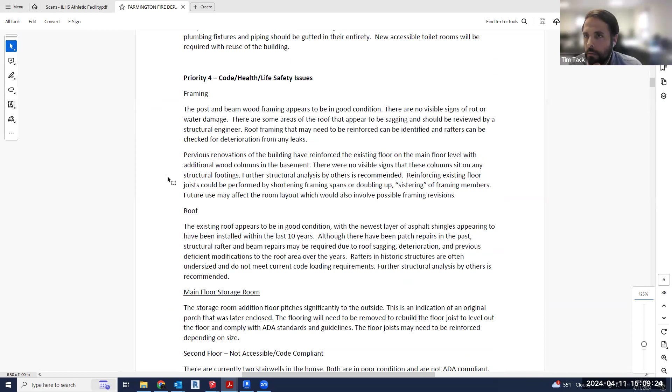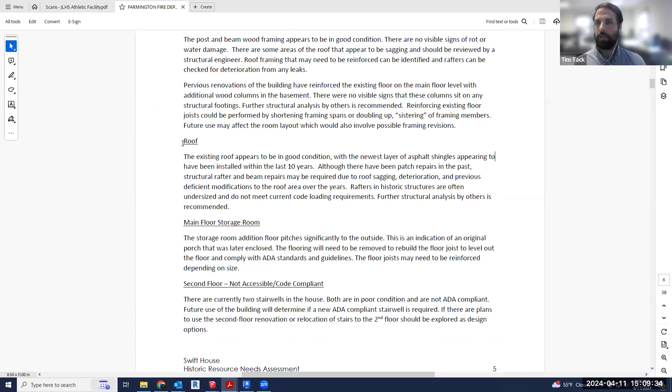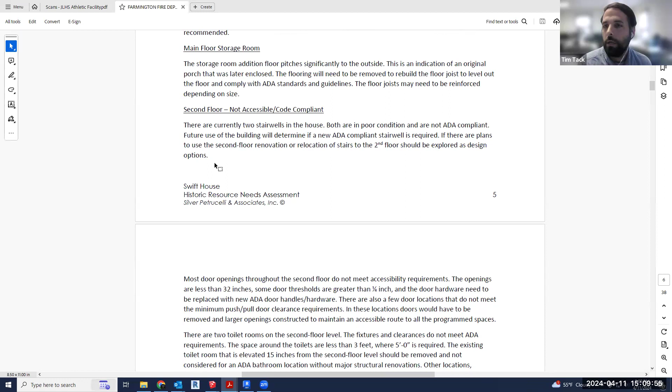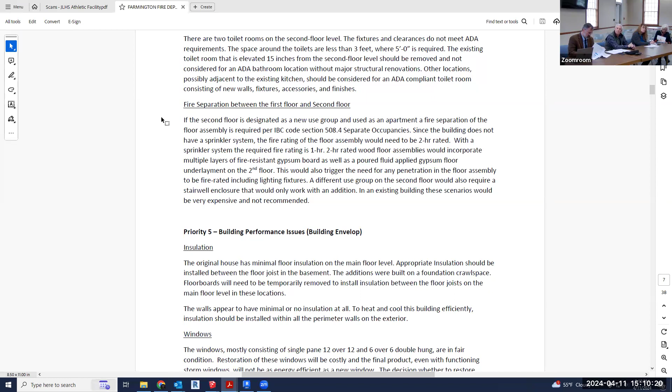So yep, priority 4. So it's the framing issues, the roof. It talks about the main floor storage room, the pitch of the floor and how it needs to be restructured and flattened out. And then I also have the issues leading up to the second floor. It discusses restructuring the stairs. It also has a segment in it about changing the use to an apartment and what that entails, as far as creating a fire separation between the first floor and second floor. This kind of direction would also lead to the need for an enclosed stairwell, which I included as an alternate on the drawings.

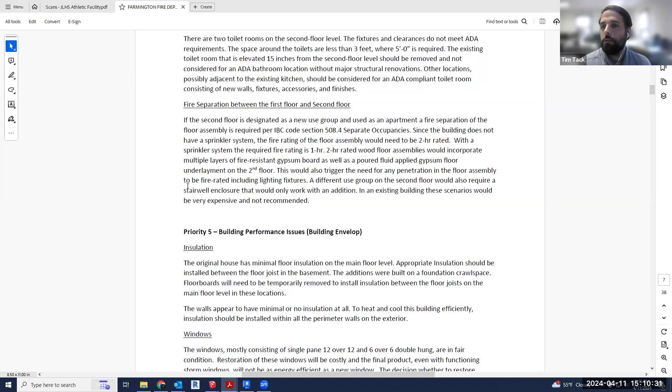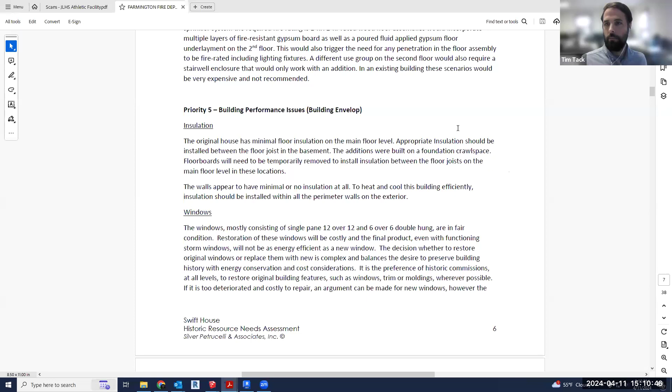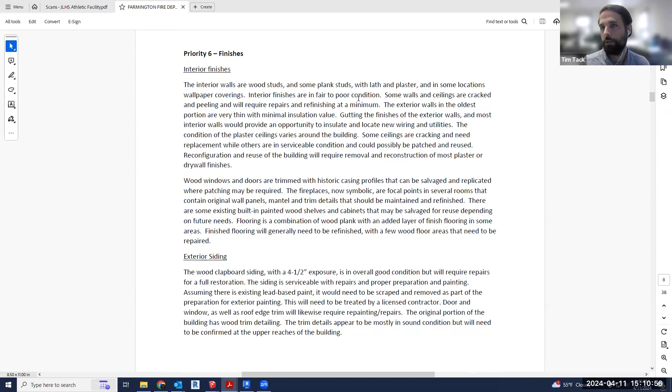Moving on to priority 5, building performance issues or building envelope. This really relates to the enclosure of the building, with the windows and the insulation. And priority 6 is finishes. So it would be interior walls, ceilings, floors, and exterior siding.

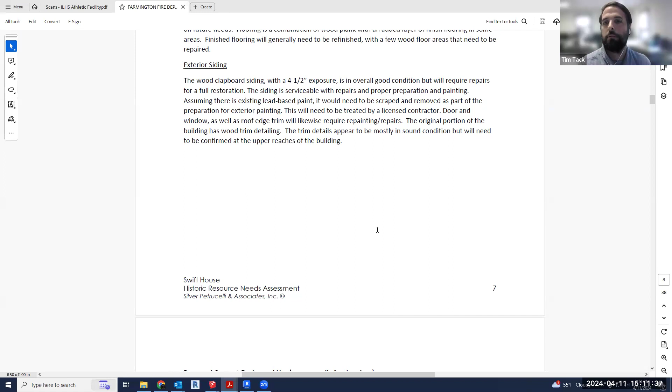And I also wanted to say that the priorities 1, 2, and 3, updating those ADA requirements, also is triggering the need to update your heating, your cooling, and electrical. Not on a full capacity, but if you look at the outline, you'll see the effect it has and the cost related to it. Where did that come in priorities? Tim, can you explain that? Because I'm mystified by that. How is the HVAC system tied to the ADA? Right.

Well, changing out or redoing a bathroom is definitely gonna need you to do new plumbing there, new electrical. The heating and cooling, that's not necessarily a requirement, but based on the conversation we had last time, we talked about the idea of the space being heated and cooled. I know someone mentioned in the summertime the need for cooling the space for the people that are gonna use it. It's not really like a code requirement, right? No. Okay, all right.

Well, if we're making modifications and we're doing a renovation and adding a bathroom, whatever systems are adjusted by that one space, we need to bring those systems up to code. So the reason why HVAC is referenced for a bathroom, for example, is exhaust, right? You need exhaust. And that's a fairly simple system in terms of exhaust fan in a bathroom and so forth. But in terms of heating, if we're connecting to the existing system, how are we connecting that to make that work? Are we adding other ventilation into that space? So it's related, it's a byproduct of the extent of the renovation. And I think that's what we were trying to make sure we don't lose sight of when we're doing these ADA improvements and we're moving walls and we're putting in new systems. There's ancillary items that tie into that level of renovation and alteration.

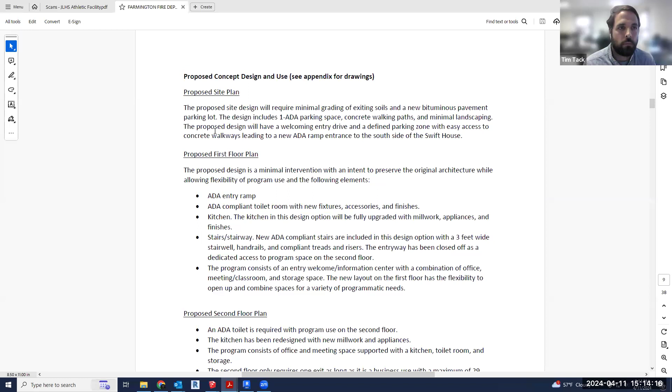The building code has different levels of alteration. A level 1 alteration is, think of it as just you're changing carpet and paint. You don't need a building permit. You can do that on your own, your house or in a residential building. Once you start moving walls and doors, you enter into a level 2 alteration, and that begins to trigger other code requirements that go along with it. So there's a bit of a path that you take through depending on the extent of the work. So that's sort of the context that we're trying to explain within the report. Okay, thank you. You're welcome.

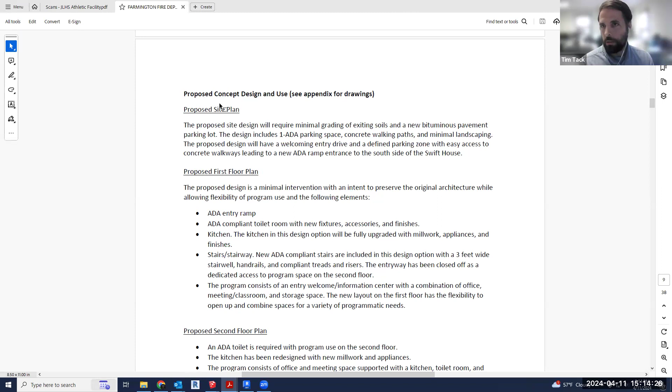So, the second part of the report talks about the proposed site plan, first floor plan and second floor plan. And I made modifications to the site plan just to include one ADA parking spot and then a path that leads to an ADA entrance from a ramp on the back, on the south side of the original building.

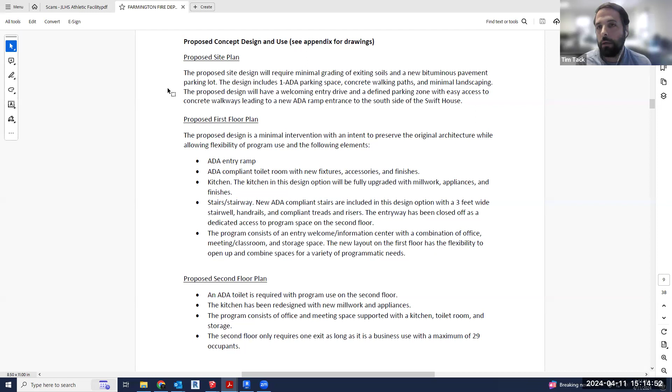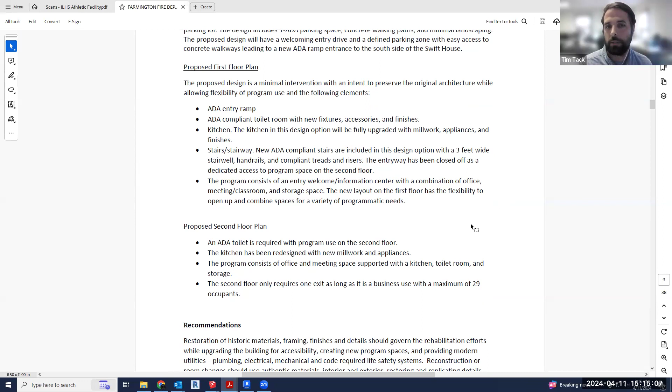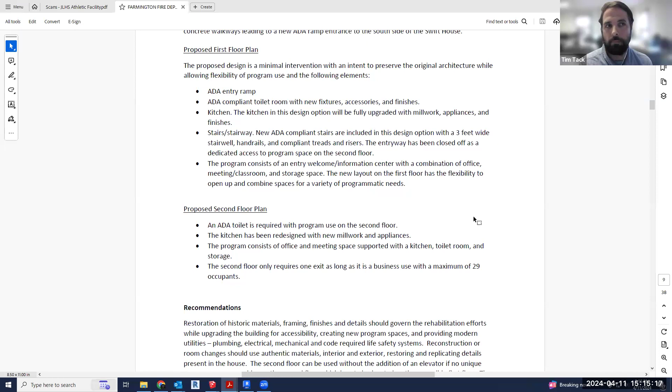And the proposed second floor is basically the same as was proposed last time. The only thing I added was an alternate for an enclosed stairwell on the exterior, if you decide to go the route of changing the use and making it an apartment. It has to be on the exterior, did you say? It has to be enclosed, like a fire rated enclosed stairwell.

There really isn't a lot of space to create an enclosed stairwell in the existing building. There are two stairways to the second floor. Neither one is to code. Right. But they might be able to be made to code. Would that satisfy the requirement, or does it have to be an exterior stairway? It needs to lead to the exterior. It needs to be wide enough. It needs to have a proper rated enclosure.

So the solution, as you see, is often you add on as opposed to taking floor space and modifying the existing structure accordingly. Either one of those solutions is acceptable. It would just have to be an evaluation of cost effectiveness. That could be explored through the next step of design development. But typically adding on that second means is more cost effective than trying to surgically remove the structure and open up that area to make adjustments to fit it in the existing framing.

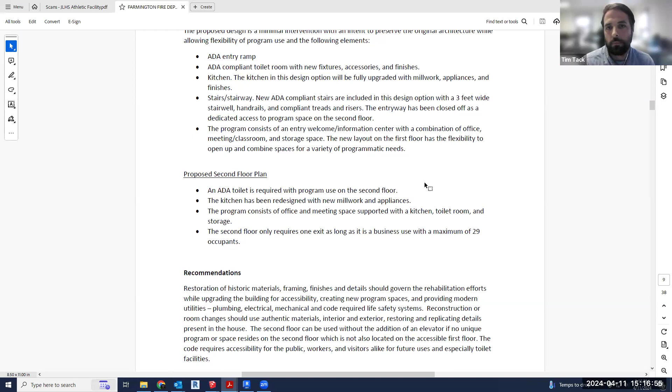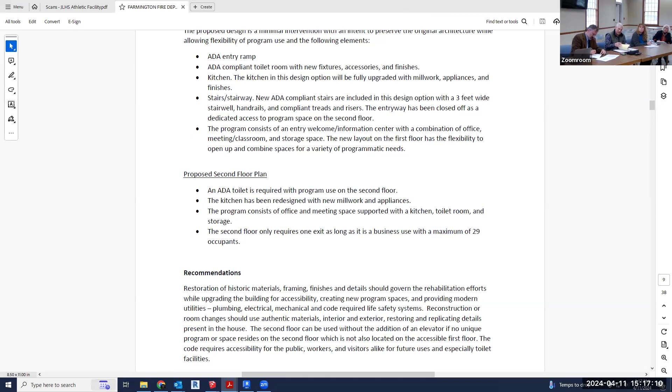I was just scouring. Yeah, I think that's Tim, maybe somebody that's talking to Tim. Tim, I think you've got some background noise if you want to let the team know. Yeah, he was muted. Tim, you probably need to unmute so we can hear if you're talking. Apologize for that. All right, looks like he'll be back. Thanks, Tim. Okay, apologies. All right, why don't we continue on, Tim?

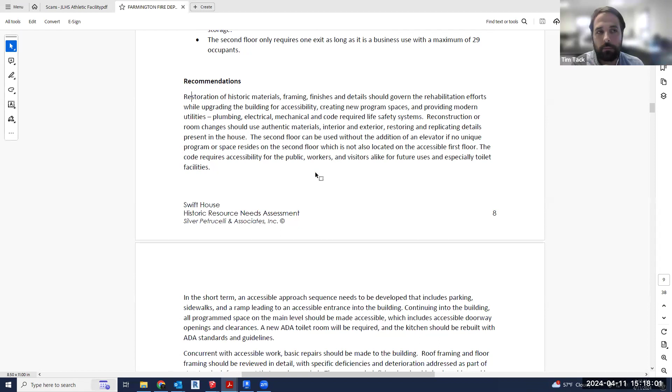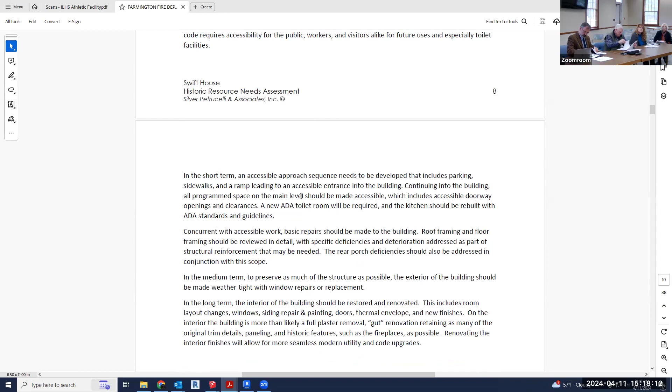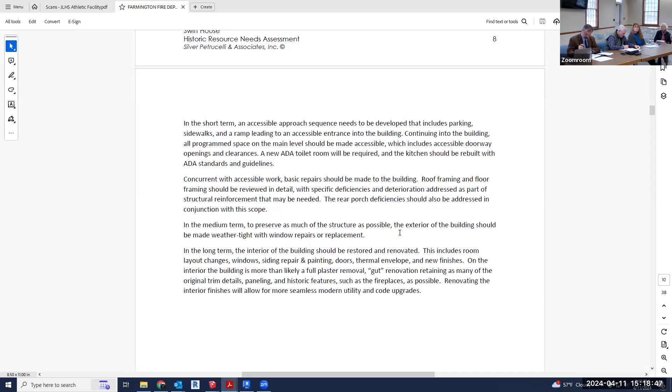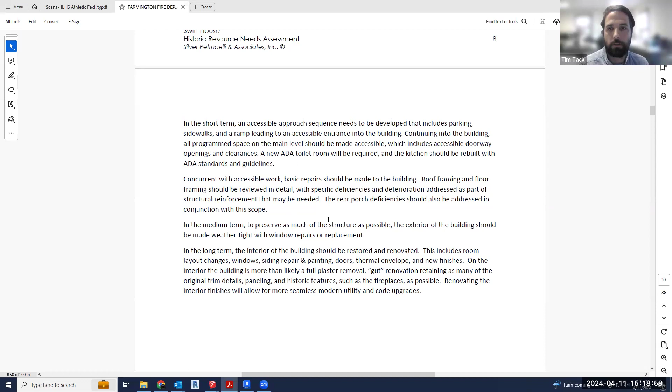Okay, so the recommendations talk about addressing those ADA requirements first, and then at least investigating the roof framing, the floor framing, and looking at those rear porch deficiencies: the fact that they're not sitting on any footings, and they don't have appropriate ADA required steps, risers, handrails, and guardrails. Would all of the entrances require that or just the ADA entrance? You just need an ADA entrance, but those steps aren't ADA compliant. You just need one leading into the building and as an exit.

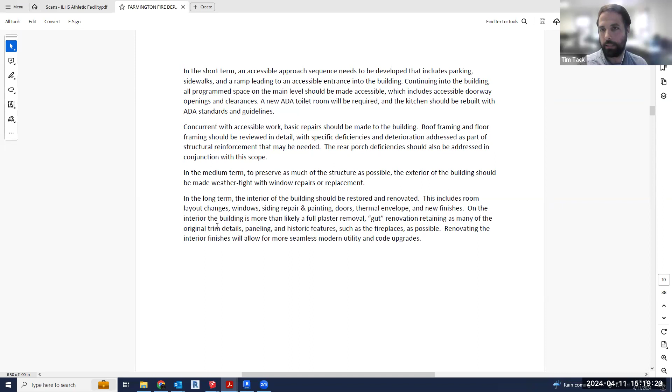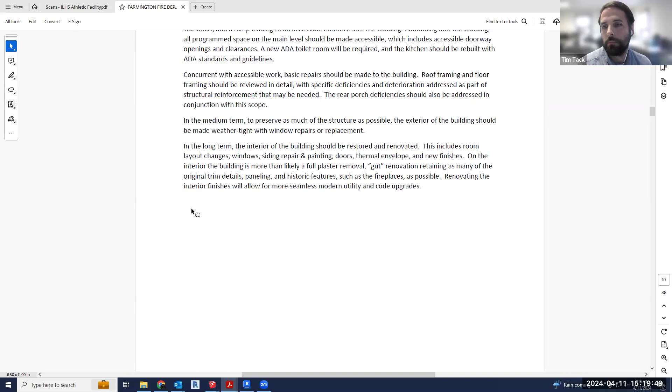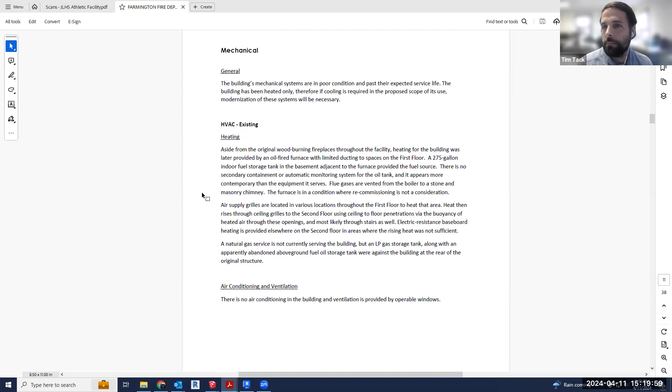And then the long term is really looking at priorities 4, 5, and 6 together as a long-term intervention to renovate the building. I talk about the full plaster removal or gut renovation done simultaneously with the thermal envelope. If you do decide to do that, it's more cost effective to group those together. Mechanical, electrical.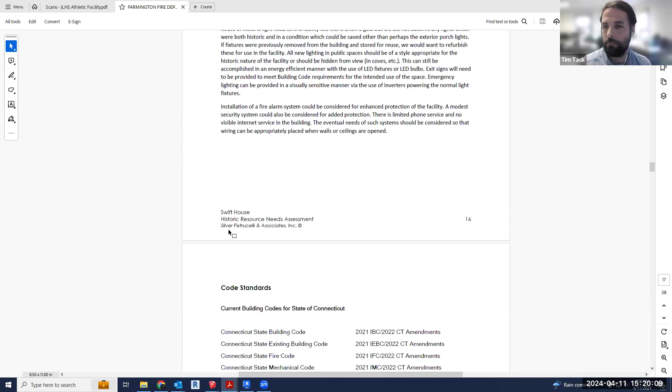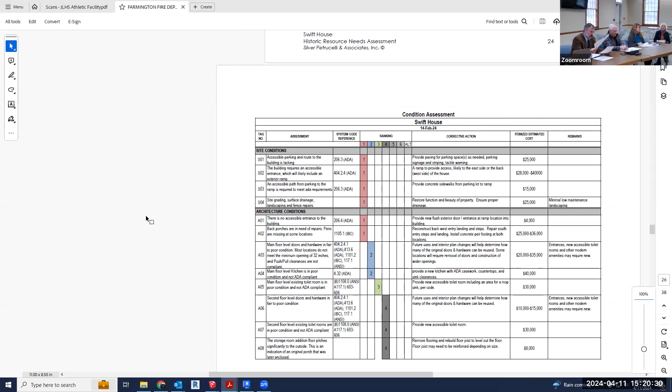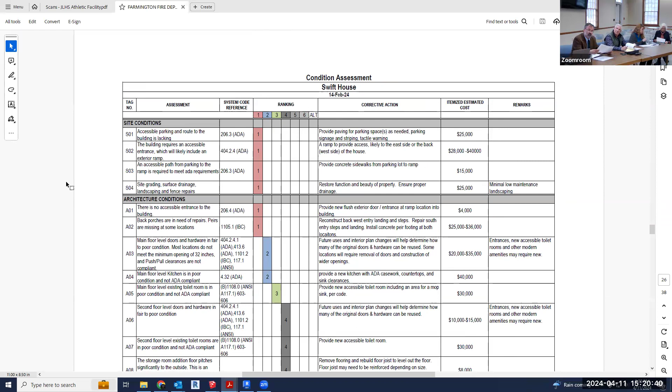Are there any things that you want to specifically review or go over? I know one of the things we were talking about last time was the parking. The parking outside was one of the things we were concerned about last time. Okay, sure. Tim, do you want to go to the outside and look at the entrance and the parking area next? I'm sure we'll generate other questions from there, but before we get to the priorities. There you go.

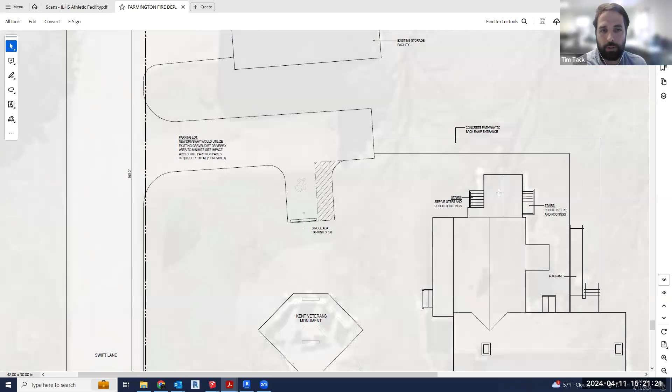Wow. So the driveway utilizes the existing gravel dirt driveway to minimize the site impact. There is an accessible parking spot adjacent, and then a concrete pathway leading to a back south entry ramp into the building. Back to the south end. I didn't look at this close enough. Yeah, they moved the entry to the back instead of the porch, it's going around. But it's not even the door that we were talking about.

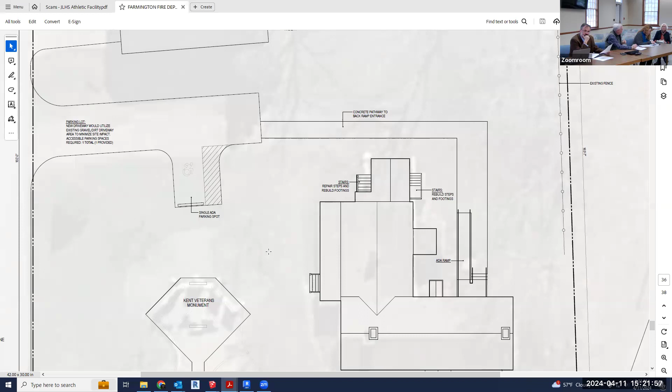No, there isn't a door there, right? That was originally what we thought we'd go to. Yeah, there is a door there. Right, that door is there, west of the bulkhead. No, I'm just saying, where is the entrance? Where is the ramp leading to? Where is the door that it would go into? It goes to the door that's in the chamber office.

So can you explain the thought behind that? Why is that best? It's a different option to incorporate a ramp. It's less height than the front of the building; the front or the east side that was originally placed is 35 inches. This would only be 18 to 20 inches. So it's going to be less impactful on the site. It's going to be less impactful on the size and scale of the ramp. You won't need any guardrails for that height. So it's minimal in that sense.

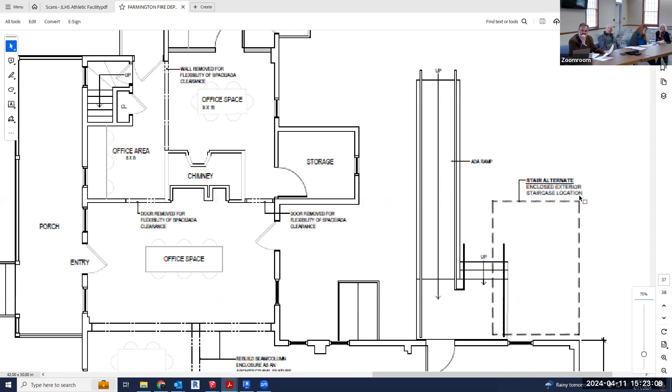What is the dotted line to the right of that? This is showing where a stairwell enclosure could go if you decided that you wanted to further develop the second floor as a separate use, as like an apartment, and you'd have an enclosed stairwell there. That makes sense.

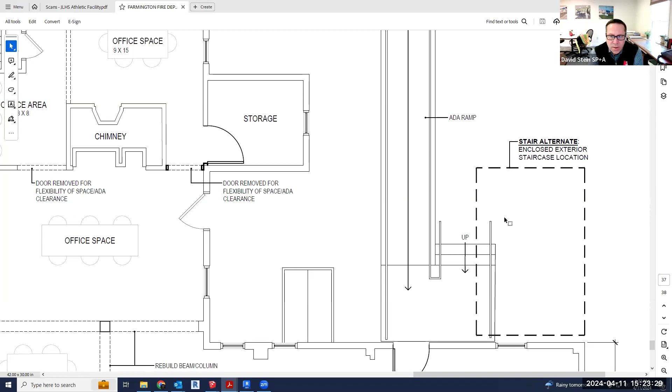I also wanted to point out the ramp being sort of located back there preserves the architectural integrity of the front of the building without having a ramp, which is a bit utilitarian in its look, right? So, calling it the back of the building or the side of the building, as there were many additions, just the overall scale of that provides a bit better proportion. There's already access to that hatch there, so it's a bit more utilitarian in that way.

Although I just want to also be mindful in terms of our universal design practices for ADA, that we don't like to create secondary access ways to a front entry of a building. So we have to be mindful that this needs to operate like it's the front entryway, and essentially not send people with those needs around the back and give them any undue extra pathway to get there.

So this solution is trying to find that balance, but I do want to point out that in ADA we try to integrate that with the front entry, but often in historical buildings a secondary entryway is allowed and is proper practice. Our US Capitol has that, with monumental steps to the front, but tucked to the side are the ADA accessible entry pathways. So there is that best practice that comes into play, and I just wanted to point that out when you're looking at positioning of where that should or should not go.

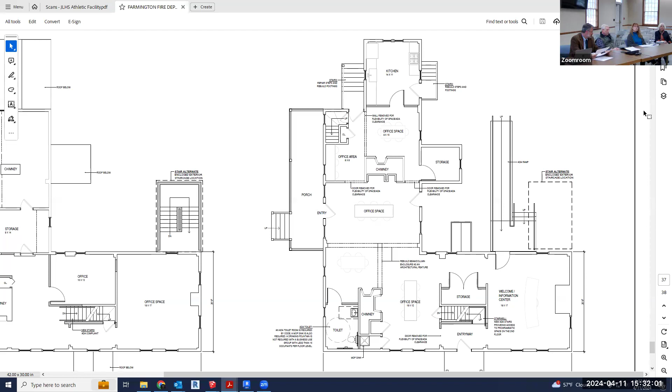We lost them. Oh, we may have. I think they're frozen. No. And I don't hear anyone else either. Is anyone else still here? I don't know, they just went black. Yes, they did. All right, we should be back on. Oh, okay. We lost you for a second. We can't see you, but we could hear you. Oh, we're good. There we go. Now we see you. Okay, cool. Many buttons.

Okay, if you guys want to continue on with some description of the ADA, we've got the ADA compliant entranceway understood. Talk about any other modifications, bathroom, the kitchen area, things like that, if you want to finish up there. Sure. The toilet room's still in the same location. The one thing I did get rid of was the drinking fountain, because if it just maintains as a business use with offices, it'd be less than 15 occupants, so you wouldn't need a drinking fountain there. Wouldn't need what? A drinking fountain. Yeah.

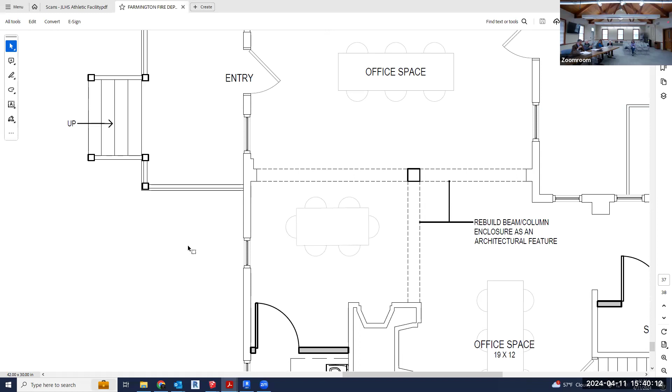No worries, all right, we'll troubleshoot. Sure, I'll call you. All right, thank you.

So there's no problem if we want to do this in phases, right? If we want to tackle the accessible entrance in the back and the toilet on the main floor as our 2 projects, as long as we plan it and say that's our phase 1 and our phase 2 is X, Y, and Z, we're okay with the ADA, correct? That was our understanding. The first three priorities address all the ADA compliance. What was on the main floor? The toilet, bathrooms. Right, yeah. Okay.

And two is, I had written down, access to goods and services. Yeah, so that would correspond to the doorways, to the kitchen. Yeah, any issues with the floor grades?

But I guess my question is, we've been told by our town attorney we can't open the building until it's ADA compliant. So as long as we do the two things, the accessible entrance and the toilet, can we do the other things, like main floor level doors and hardware and main floor level kitchen, as a second phase? Because we'd like to have the building open again.

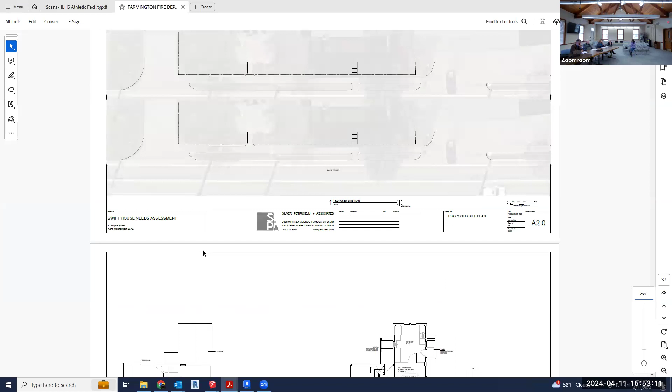One of the things that we talked about in our last meeting, I don't see here in the second floor plan. We talked about having a second lavatory, restroom, that would be accessible at the top of the stairs. So there's a very big bathroom there that could be made into a powder room and a private bathroom if the second floor were used. This is downstairs. Oh, so are you talking about the second floor? Second floor?

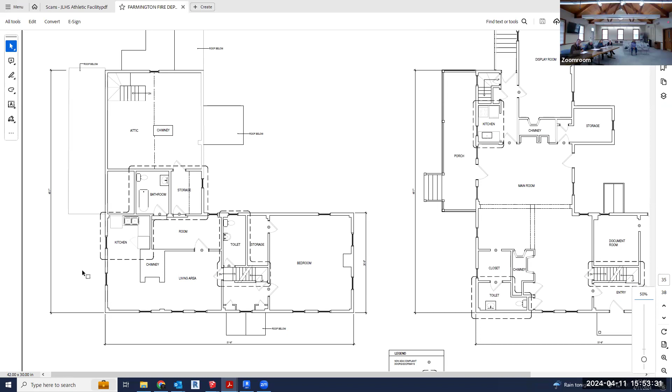So just want to note that anything on the second floor without an elevator is not designated to be accessible, so we wouldn't. No, it wouldn't be accessible because there wouldn't be any use of the second floor that would require accessible. I mean, I think we would stay away from that because we don't want to put in a $400,000 elevator. Correct. And there's no other way to get to the second floor.

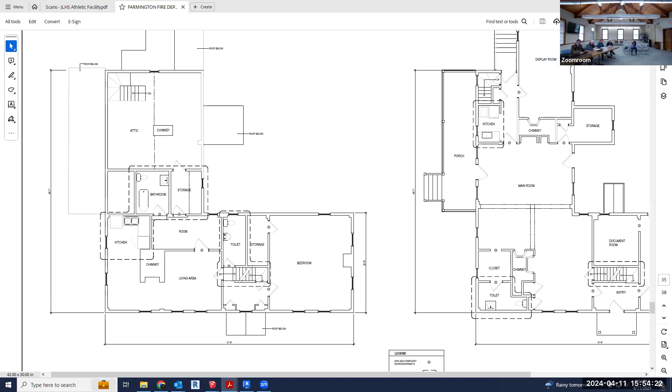So the second floor, among us, the Selectmen and the Swift House Committee have not really determined the use of the second floor because we were waiting for feedback from you about what would be required if the existing apartment were upgraded. And maybe as a part of that, the large bathroom could be accessible from the top of the stairway by perfectly ambulatory people. What we've articulated now for you is a 1-bedroom apartment on that second floor. And there is a bathroom that we are showing.

Tim, could you zoom in, please? The toilet room here. Well, I mean, there are 2 bathrooms now. Yeah. And what is in the middle there? Potentially office space, yeah. It's a bedroom. Anyway, could we put a small bathroom entrance from the landing at the top of the stairs? Why, if there's another bathroom? Because we don't want the public to go through the private apartment to get to the bathroom. I see what you're saying. Okay, that's all possible.

We're just trying to think of stacking plumbing and piping and so forth. So that could be explored at a next design phase, but any of that is plausible. I mean, there is plumbing there now, at the top of the stairs, where the office space is. But if we do anything with public, then we have to get ADA access to the second floor. Well, the ADA compliant bathroom would be on the first floor, and the second floor bathroom would just be for other people who don't require ADA.

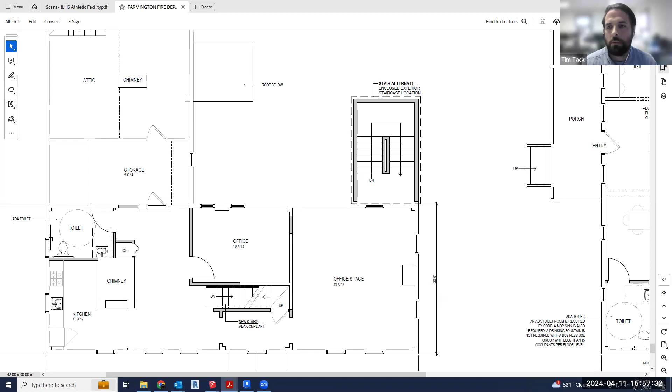A quick question, then back to what Glenn was saying regarding SHPO's relationship with you guys. Your responsibility for sustaining any kind of historical basis is once the building has already been designated as a historical register building, is that correct? So when you go to the library or the former church library, it's because it's already been designated that you need to coordinate with SHPO, right?

You're also required if there is other state funding. So even if it hasn't been designated, based on the age of the building, they would still want oversight to review the plans. You're at a stage now where I'm sure they're willing to have conversations with you and provide you with some guidance related to that. But if it is designated, they are required. They have a mandate to have oversight over it. If it's not designated but there's funding involved, they still have oversight of this.

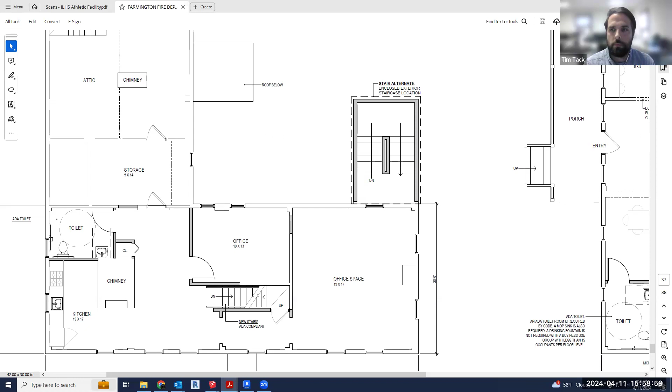But the work on the inside, they essentially don't have any comment on unless it affected the exterior. And that's where that exterior stair would come into play, and they would have questions as to what that would look like and where it would be positioned, but the ramp, there would be very minimal oversight on that.

I just want to make sure I understand the second floor that you're showing us right now. If it's residential, we need to have 2 stairs, is that accurate? That is correct. And if it's not residential, we could have 1? Yes, because of the size, it's so small. And it's the same use on the first floor and second floor. Yes, you won't need that separation because of the square footage. If it was a larger floor area, there is a threshold, then it would require 2 means of egress.

And by this floor plan, is it possible to make those front stairs ADA compliant? It says new stairs ADA compliant on this plan. Yes, what that means by ADA compliance is the handrail. We need a certain width, so we need to make that new stair wider. We need to make the rise and run of those stairs a certain dimension, and then the handrail needs to have a certain dimension. So that's what ADA compliance means, related to the handrail and those stair dimension requirements.

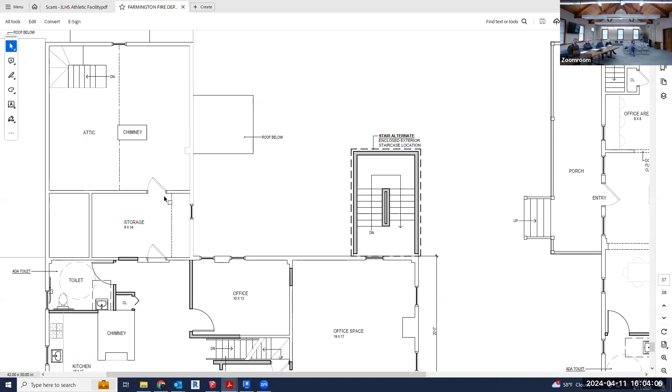Okay. Well, at this point, then, tell you what, I think we need to get together as a group and discuss this again, without having to take a lot of your time. But we would like to, because we do need to close this out with you. Give us a chance to get together in a week or so, and then get back with you with final questions and so on, and then we close it out. Would that work for you, David? And Tim? Perfect. Absolutely. Whenever it works best for you.